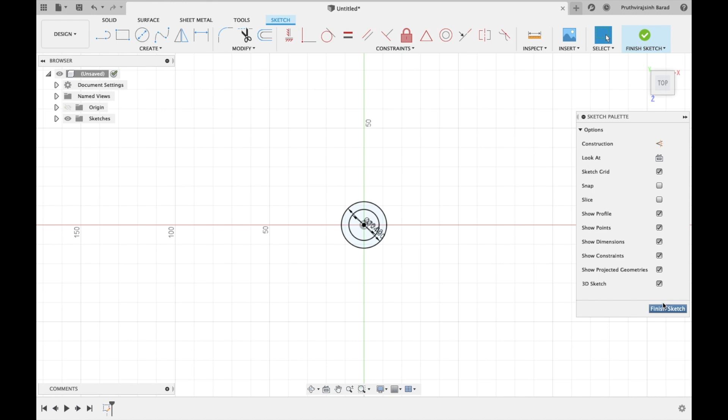Now click on the inner circle area, make it Extrude by Extrude feature, or press E from keyboard, extrude it for 60 mm.

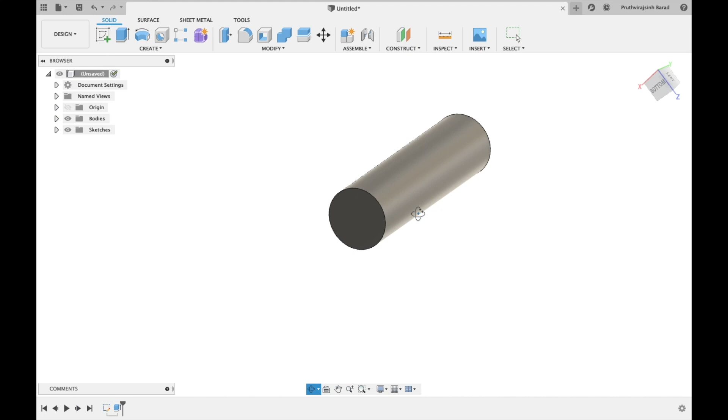Now go to Browser, click on View Sketch, select the sketch, further select the area of outer circle and extrude it for 10 mm. Press OK.

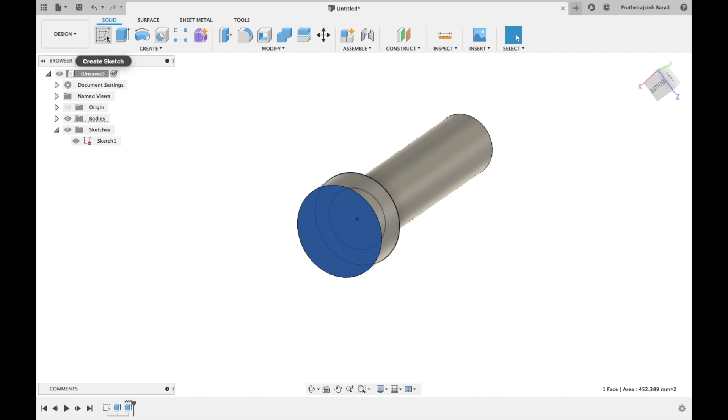Select the top surface and go to Sketch. For hexagonal head, we have to create a hexagon on the surface. Select the line or simply press L from keyboard. For clear view, click on bottom plane from the globe. Now select the point on top of circle and give length of 12 mm, half of circle diameter.

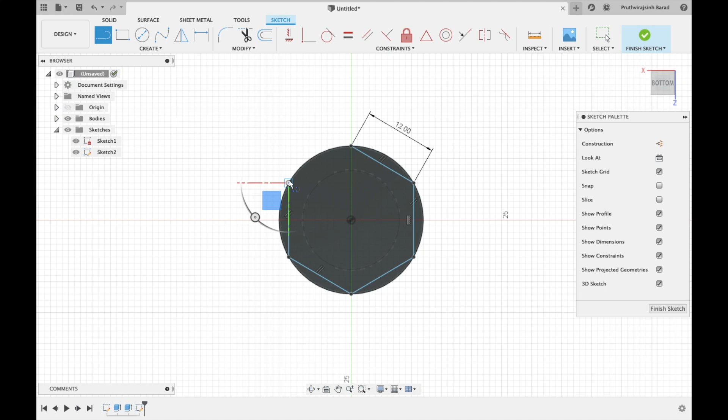Select other point of line on circle. Do same for each 6 lines. Starting point will be end point of last line. Give length of 12 mm, and select other point on circle. Click on Finish Sketch.

Now, select the area between arc and line, for all sides of hexagon. Create extrude cut for 11 mm.

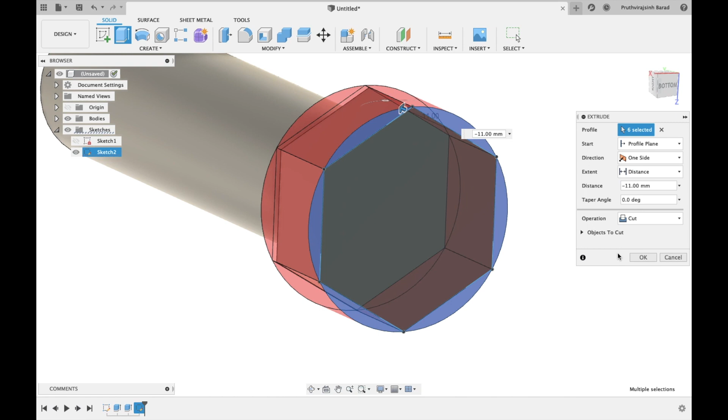Select all the sharp edges of head. Further, select the fillet from modification features or simply press F from keyboard. Give the fillet value 1 mm.

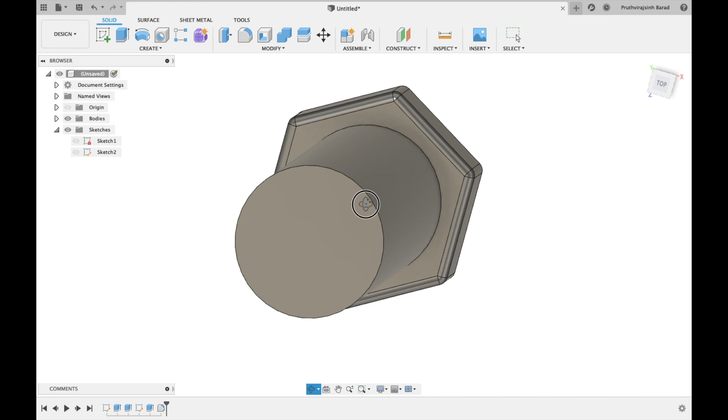Now, go to Create and select the thread feature. Select the surface of bolt body. Click on Modeled checkbox. Remove click from full length checkbox, or simply drag arrow from model. So, we can create thread length as per requirement, 25 mm.

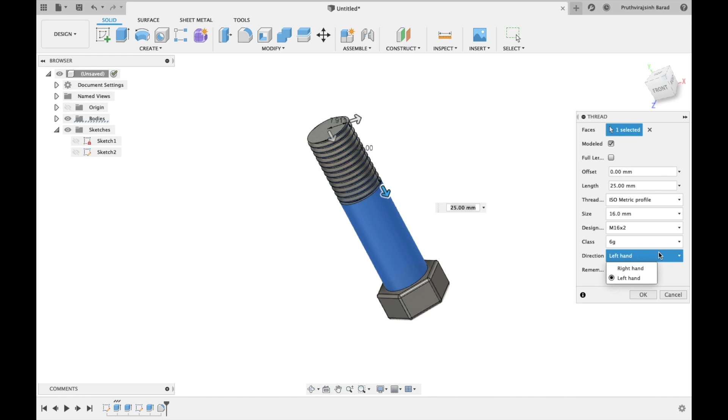In thread, you can select types of thread. Pitch can be adjusted by designation row, class and also direction of thread. Right hand or left hand can also be done from here. For strength, remove the sharp edges, so give fillet of 0.5 mm, press OK.

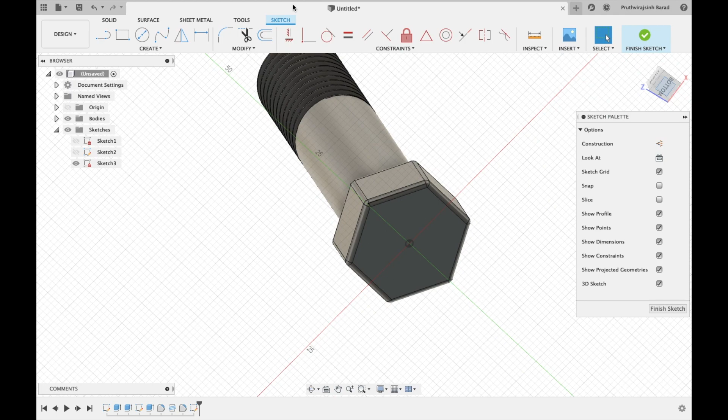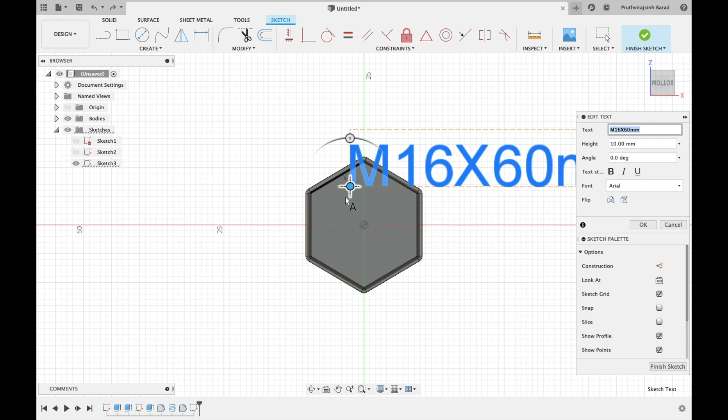For modification, we will know how to write texts. Select the bolt head surface and create sketch. Now click on text. Write the text M16 60 mm. Adjust the text in center of head. Give the height 3 mm.

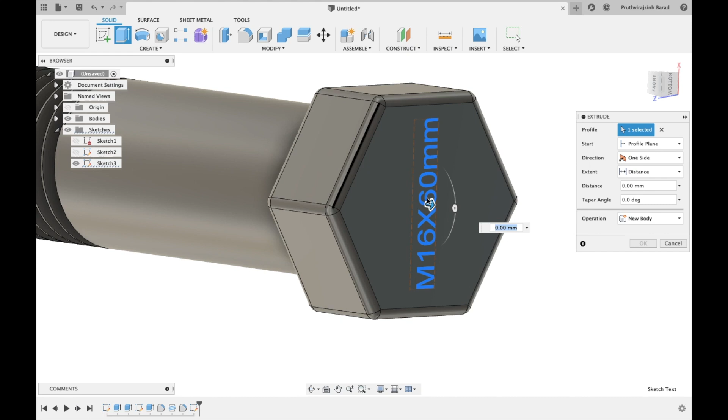Click on Finish Sketch. Select the sketch text, make extrude cut for 1 mm. Press OK. M16 60 mm bolt is ready.